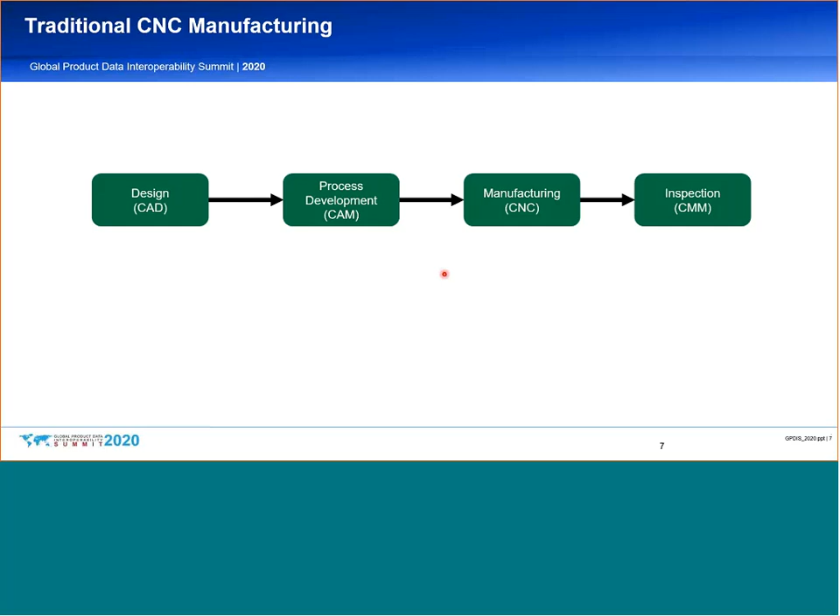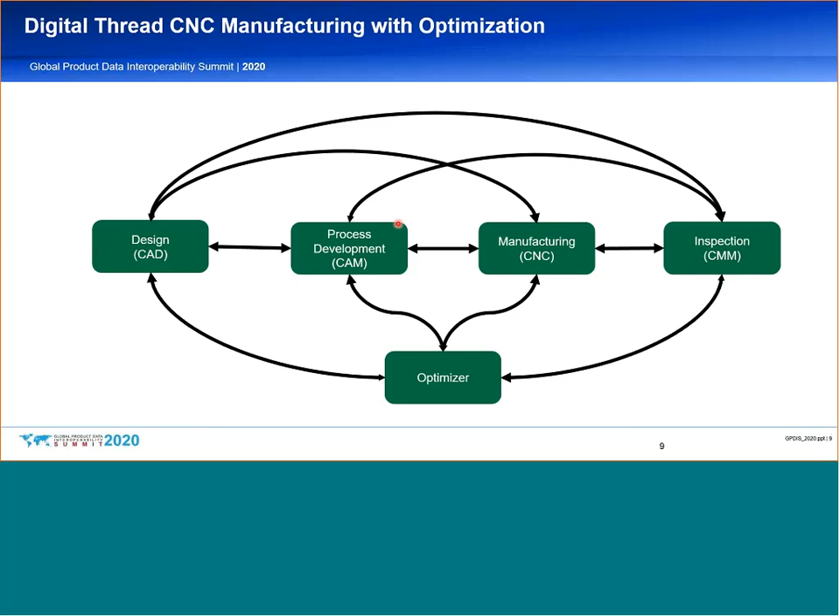Digital twin, digital thread is the buzzword. It's near the top of the hype cycle right now. Everyone's talking about it, and that's really great and exciting, but then what do you do with it? If you want to do something with it, you have to add extra capabilities. So let's add a process optimizer that can work between design, process development, manufacturing and inspection, and start to tie all this stuff together. Well, if you want to do that, then you just bumped yourself up to 10 bidirectional threads, all with large amounts of information that need to get passed back and forth between these disparate systems. And it becomes a really big mess really quickly.

And then if you want to do something more, let's say you want to add resource management to it. That is, okay, I've got a CNC machine tool, or I want to manage my cutters. I want to track what's going on in my cutters. I want to look at my inspection processes and tie that in. Every time you add something to get this information, you really complicate your data transfer. And we're up to, I think, 13 now is the count.

And what's interesting is that this is a pretty big mess, and if you look really carefully at the demonstrations and proposals in this world about doing some resource management or optimizing, you'll find that they don't show a picture like this. They'll just show the connection between a CNC and resources, or between a CNC and an optimizer. They won't show the whole mess because it's such a difficult thing to deal with if you're dealing with point solutions, that is, point-to-point, unique proprietary connections between all these different components. And so if you look carefully in these demonstrations, you'll see little workarounds to that.

Like, they want to develop communications between a CNC and a resource, so they'll invent a JSON schema or an XML schema to do that, or even worse, a comma-separated variable file, Excel spreadsheet way of communicating this information, which works in an individual segment, but it really misses the fact that you've got all these other components and processes that need access to the same data, and whatever schema you invent is going to be found wanting in the future, and you just get this big, massive mess.

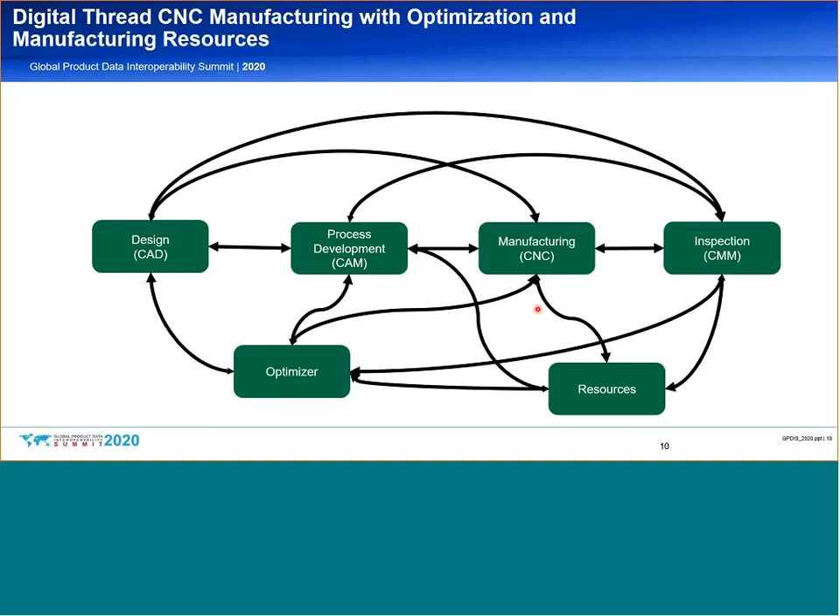And it's important, if we're going to be successful, and again, we're at the top of the hype cycle, that we make it implementable. So the idea of having a standard data bus can really help simplify this and make it easier for us to deploy and to expand and be really flexible in what we can do in this new world where we have ubiquitous data flowing from component to component.

So in this particular case, instead of this rat's nest up here, we go to what is essentially a data bus, where we have standard data that's able to bidirectionally communicate with an optimizer and with resources and with inspection and manufacturing and so on, using standard data that's been carefully architected to understand the data requirements, both for the immediate problem or what the future problems and challenges and requirements might be, and that data being in a more modern architecture that is less restricted by the storage limitations of the 1960s.

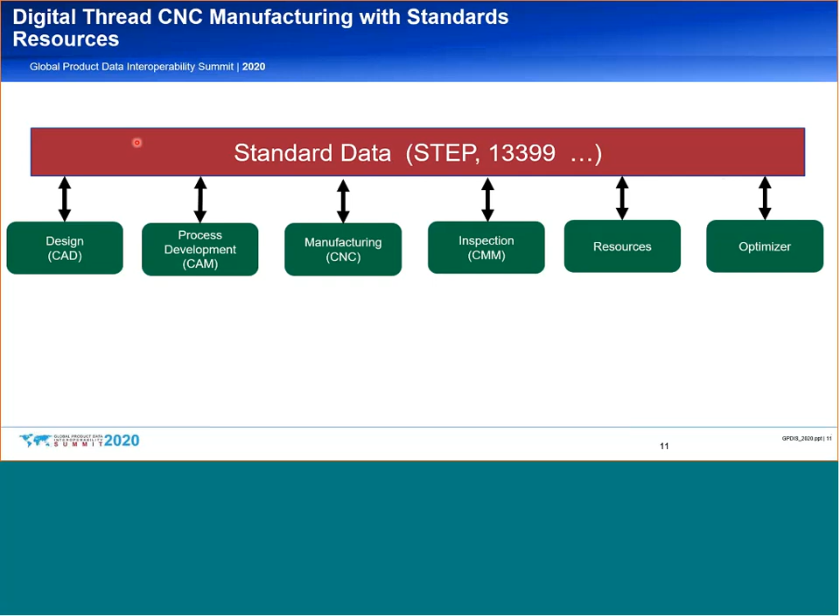And again, this gets easier as long as we're settled on what that data needs to look like, and as long as we've got a comprehensive suite of tools that we can put into a standard data bus that we can use to share this information. So fortunately, there's a lot of work that's been done in industry and in standards organizations and academia to put this standard data bus together.

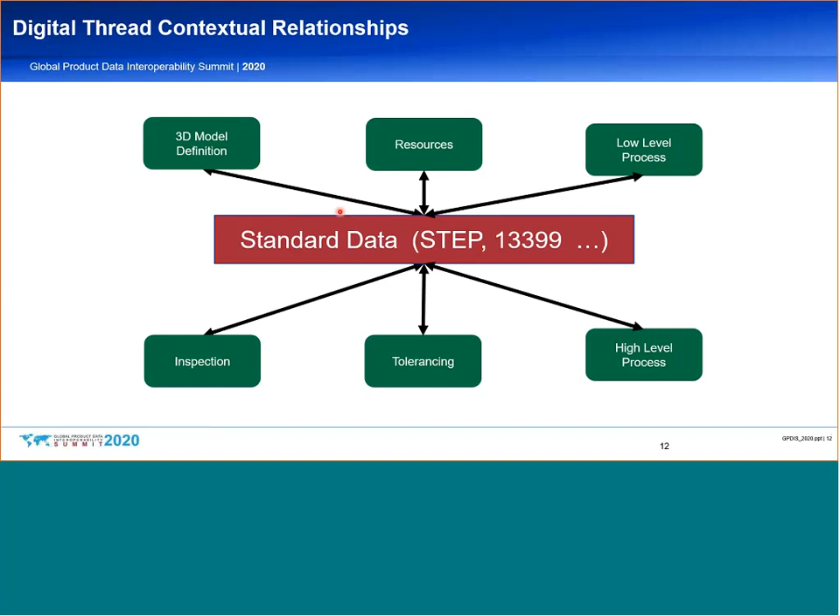So now that I've completely convinced you that we need to do it this way, what I want to do is spend much of the rest of this presentation talking about the various components of this standard data bus that's available to us now, where they are, how they work, and what state they're in. The first one I want to talk about is STEP. And probably most people have heard about STEP.

STEP is ubiquitous throughout design. When people talk about it, they say, give me a STEP file. What they're really saying is, give me an ISO 10303-242 file, which is defined as managed model-based 3D engineering. Us folks that work in the STEP world are notoriously vague and careless when it comes to throwing around terms and talking about something as STEP. You can call it STEP, you could call it 10303-242, or maybe we'll call it AP 242. It's all over the place. We're really sloppy about how we describe it.

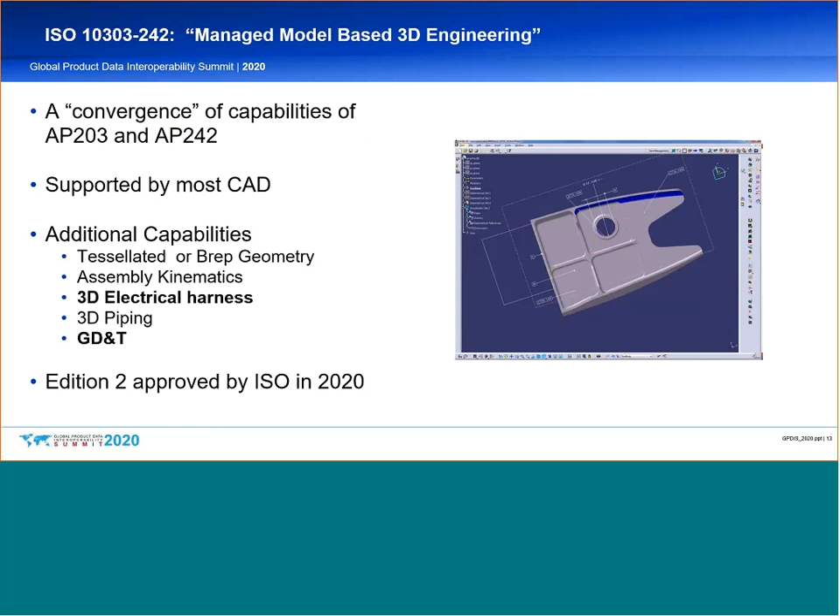And it has additional capabilities that you wouldn't expect. It can support geometry as tessellated or triangles, or it can represent data as B-rep geometry, that is explicit definitions of geometry. It can support kinematics. It has tools for working with three-dimensional electrical harnesses, three-dimensional piping, and dimensioning and tolerancing are all covered within STEP 242.

Edition 2 of STEP 242 was approved by ISO just this year in a pre-COVID world, and what changed in that was that the standard became more modular. That means it became easier to share different components of the standard with other parts of the STEP suite of tools. It makes it a lot more efficient how we can work with it. The tolerancing capabilities, or PMI capabilities, were enhanced as well.

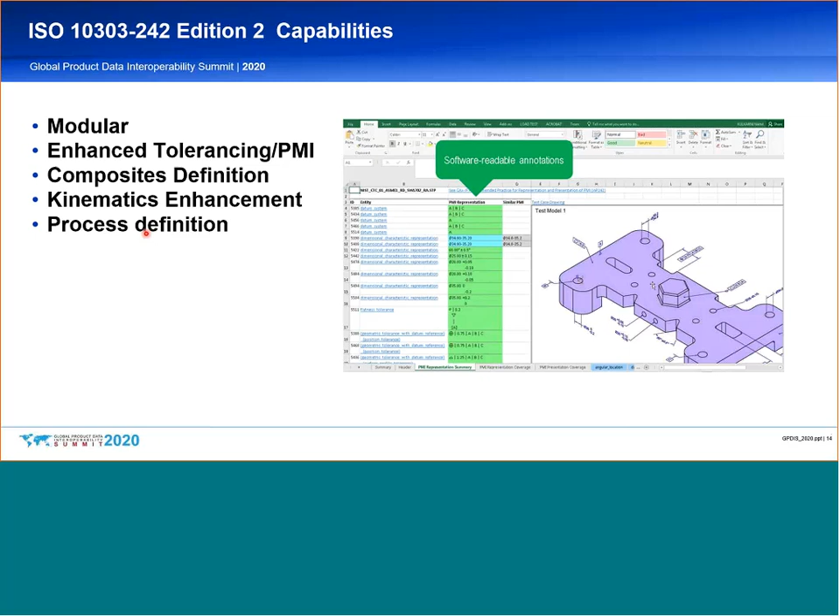Another thing that happened in edition 2 of STEP 242 is an improved composites definition, for the sorts of composites we folks at Boeing use for building airplanes and people use for doing all sorts of different things. Kinematics capability was enhanced, and actually STEP 242 Edition 2 has some capabilities to define processes. So at a high level, you can get somewhat of a process definition in STEP 242. Ubiquitous, all over the place, does a whole lot of stuff, really easy to use and easy to get at.

Slightly less known, or significantly less known than STEP 242, is STEP 238. And again, I'm being sloppy with my terminology. STEP 238 is ISO 10303-238, or Application Interpreted Model for Computerized Numerical Controllers. And you can see why we say STEP 238. It's got a slang term for it known as STEP-NC.

It's got a modern data structure, and it follows CNC manufacturing processes. High-level information like what is the part, what's the stock, what's the fixturing, what's the cutters. But also in it, you can see low-level process information is there. The cutter motion is there. Machine motion is there. Auxiliary functions are there.

Again, if you squint your eyes and look, you can see this is actually a file that's being displayed in a viewer by a small company called STEP Tools. And this displays graphically the content that's an AP238 file. You can see the fixture, you can see the part, you can see the cutter definition, you can see tolerancing information. On the left-hand side, you can see the process group.

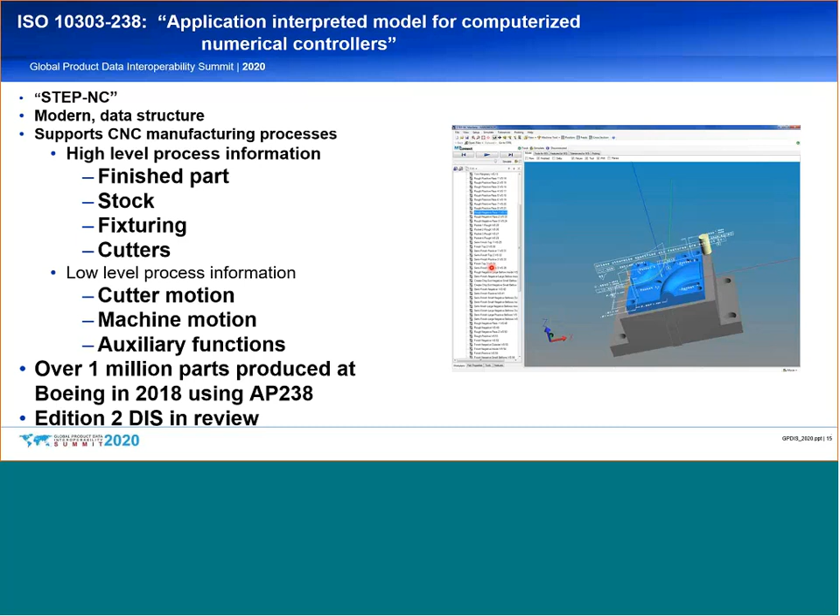Boeing, in 2018, produced over 1 million parts using STEP 238. And right now, its status is the second draft of Edition 2 is in review. Because these standards are synchronized or harmonized with one another, we had to wait for Edition 2 of 242 to get completed for us to do our Edition 2. And consequently, we were able to take all those advanced capabilities that we saw in Edition 2 of 242 and have access to it in 238, which is pretty cool.

So 238 did new things and better things. Some of the key capabilities for Edition 2 are, again, we inherited that modular infrastructure and architecture that we discussed in 242. We added automated composites manufacturing capability. If you look at this machine up on the right-hand side, I believe that lays down stringers for the 777X wing. I'm not completely sure. If you look really carefully, you can see you have different reels of fiber or tape and a multi-headed tape that will go down and will lay composites material down on this mandrel.

We had to make some changes to the schema of AP238 to manage the fact that we're handling 8 or 10 or 12 or however many rows of tape at the same time. We had to do some modifications to make that work in an efficient manner. And so that's additional capability that's in Edition 2 of 238.

We also added 3D printing process definition. You know, 3D printing, when you're talking about complex parts, is really more than just printing. A lot of people look at 3D printing, and certainly by its name, and they say, I have a 3D definition of a solid, and I'm going to press a button, and this 3D printer is going to spit it out. Well, that can work with really simple parts, but it's not so great when it comes to things that are complicated. There actually are process definitions that have to be defined.

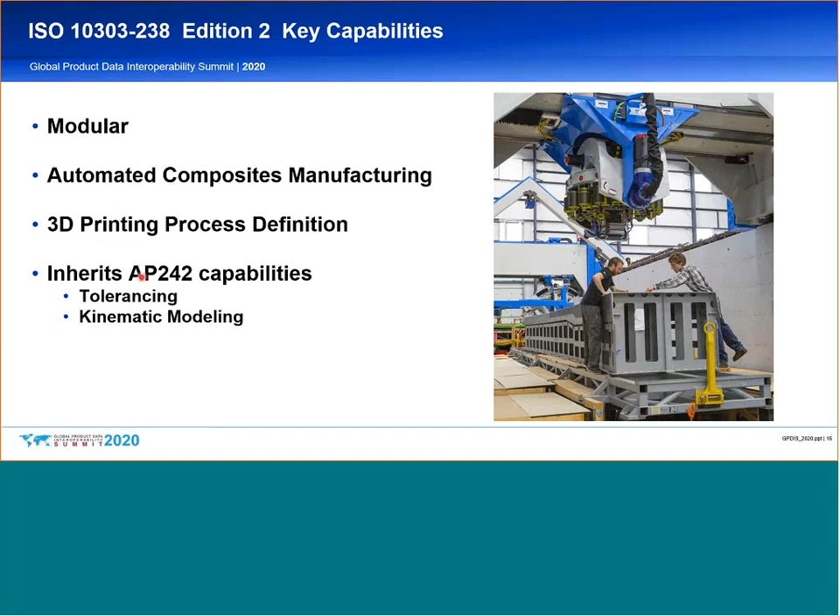Here's another one. This is ISO 13399. It's a cutting tool information standard. It's not part of the STEP suite of tools. All the STEP stuff is 10303. This is ISO 13399. It's managed by a different working group within ISO. It's STEP-like. It uses some of the capabilities of STEP representations, but it is its own standard. And it's for defining cutting tools.

It has the capability of defining tool components, such as, here's the cutter itself. Here's an insert. Here's an adapter. Here's another adapter. Here's a tool holder. And that can all be represented in ISO 13399, what the assembly itself is.

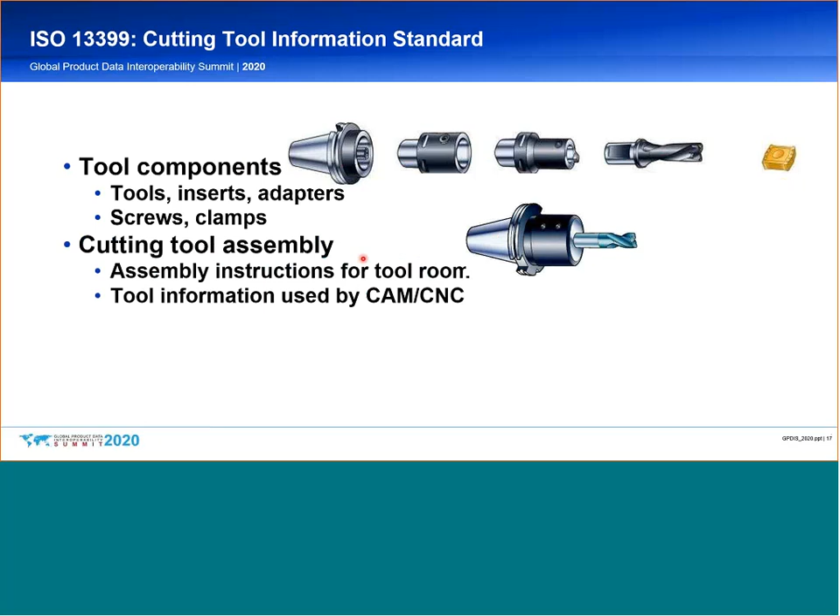But wait, there's more. It'll also define a cutting tool assembly. That is, how do these particular components fit together, and what are the rules for doing that? And it has the capability of providing assembly instructions for the tool room, and then also instructions and rules and data for the CNC machine tool to be able to utilize and understand and compensate for the length of that cutter or the diameter of that cutter, for example.

Additional capabilities of ISO 13399 is it will handle multi-function capabilities. That would be for a mill turn machine, wherein one particular tool body may have an insert that's being used for turning, and it may have another insert or more inserts that are being used for milling itself. And when you think about it, these relationships can really get pretty complicated, and that's when 13399 can step in in a neutral, non-proprietary way and help you define the components of the assembly and the assembly itself.

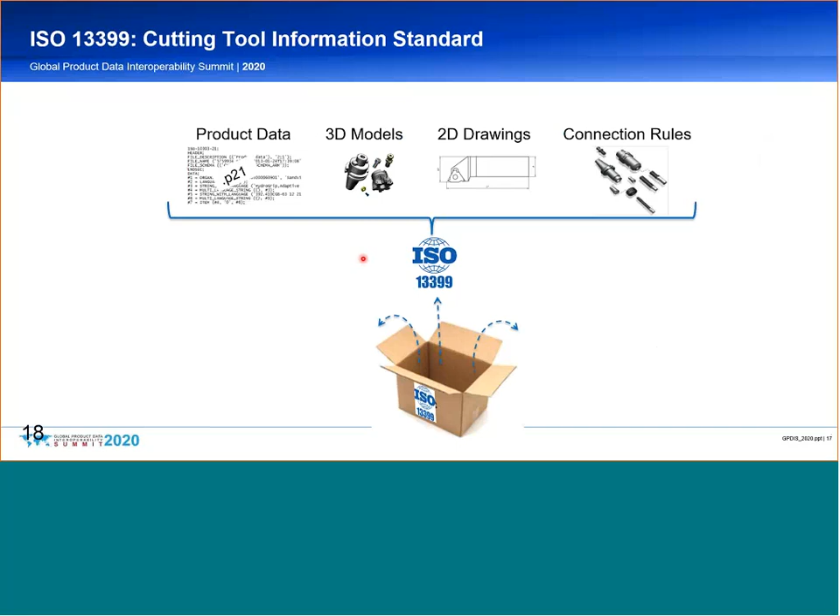Folks at 13399 also realized, though, that they needed to be able to do more than just define the tool components. They wanted to have 3D models of everything. They wanted to have 2D drawings because some places still use paper, and they wanted to be able to define the connection rules. What cutter can fit into what insert that can fit into what adapter that can fit into one type of a tool holder. So instead of making 13399 really, really big, what they did is they came up with the generic tool catalog, or the GTC.

And that GTC basically is a packaging method or a packaging definition that lets you take all these sorts of information. The drawing can be in DXF, for example. The 3D models can be in STEP or in something else. This product data is actually the 13399 data. It all gets packaged up so that basically you can ship or deliver everything you needed to know about your cutter to your supplier and to your end user and to whoever else is involved in using that particular cutter.

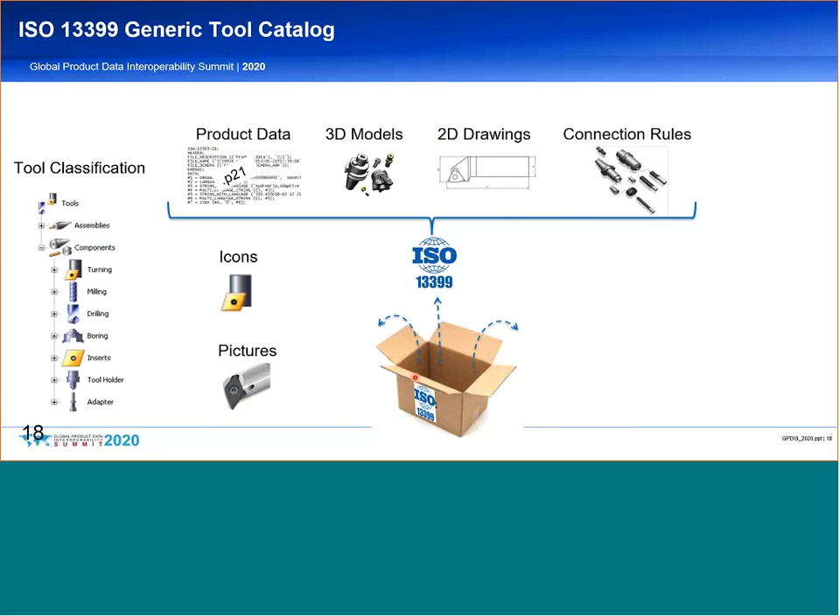In my little high-tech presentation here, which I stole, you can see a little tool classification chart on the end that, again, looks at the definitions of tools, and you can also see a packing slip, including the provenance of the data, who created the data, what's in there, and when was it created. It's a really pretty handy thing and a standard way for you to be able to find out everything that you need to know about that cutter or that tool.

And you think about it, your purchasing people need to know this information, your supplier needs to know it, the CNC machine tool needs to know it, your tool presetting lab needs to know it. And basically it's all this data in one place, in one defined format. A lot of people are using this.

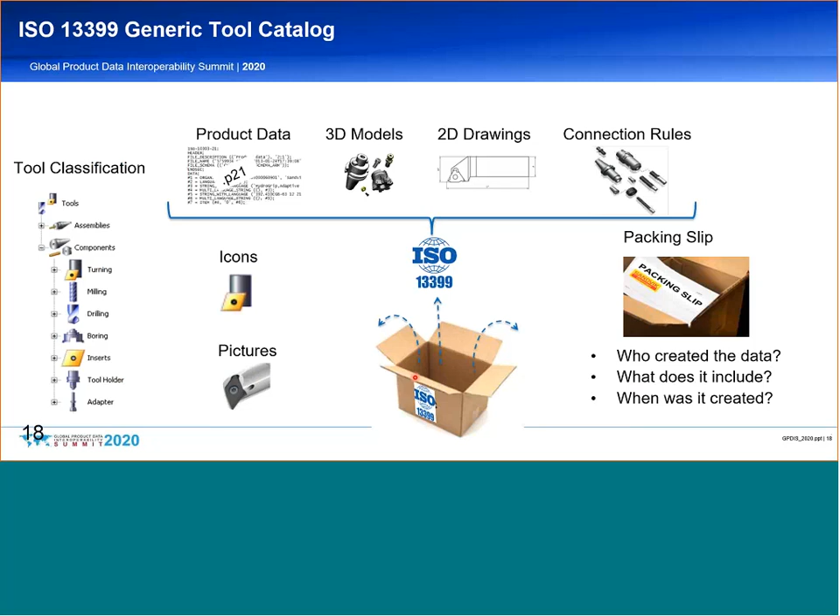So the last of the direct standards we're going to talk about is something called QIF, or the Quality Information Framework. It was developed by DMSC. These are the folks that were the developers of DMIS. You may remember a few slides ago when you were paying complete attention to what I was talking about and not doing anything else, where DMIS was an earlier way of communicating CMM instructions and I think results too. The folks at DMSC realized that they had to do something more modern, and so they invented QIF.

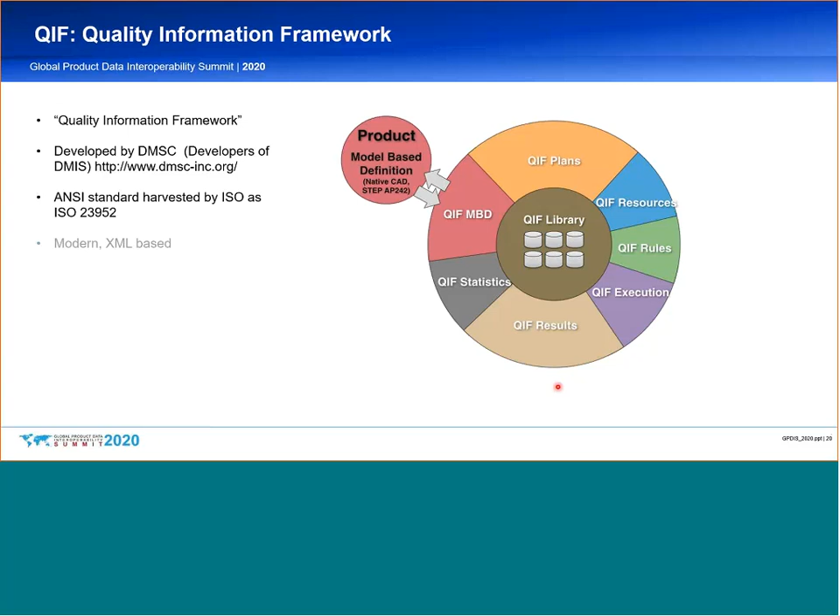It's modern. It's an XML-based schema. If you look at this chart here on the right-hand side, it has measurement plans, resources, rules, executions, results, and statistics can all be defined in there. It's pretty easy to work with.

I did a demonstration a few months back using QIF. I had limited help from our friends at QIF doing it because I wanted to see how good their deployment packages were. They were quite good. They had development kits that are available for free. They're in Python, C#, and C++. I took their .NET C# class and I converted it to Visual Basic.

And I did my coding in Visual Basic because I could, because again, it was part of the .NET infrastructure and it was really pretty easy to do. If anyone is looking for any tips or hints on the conversion to Visual Basic, you can feel free to contact me about it. And the DMSC website, which I have up here, I think they also got one called QIF. They provide these development kits for free, and they're quite good. They're quite easy to use.

So stay tuned because in 2 days on Thursday, Jennifer Herron and Curtis Brown from DMSC are going to be spending a whole lot of time talking about QIF. And QIF's really interesting to me. I'm not really a QA person, but I've been working with QIF standards for a couple of years now and find it really powerful and really interesting. So I hope you stay tuned for that and you show up for that GPDIS session in 2 days.

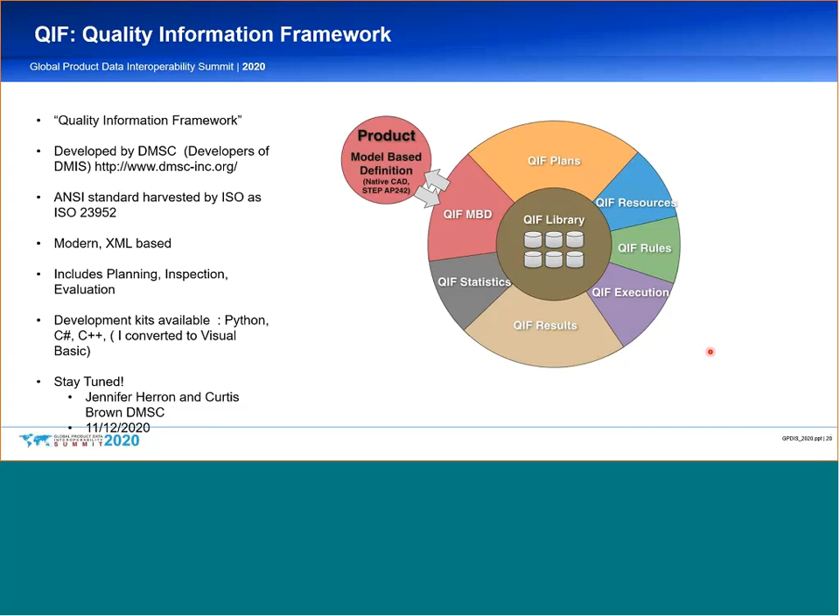There we go. Yeah, I touched briefly on a demonstration that I did. We did this as part of the ISO meeting in Toulouse, France, back in May of last year, and I've kind of shopped it around Boeing a bit. The point of the demonstration was to show that we could keep context of quality information and quality requirements throughout the entire PLM lifecycle.

So what we did was we took this test part, which actually came from our friends at Airbus. We assigned the tolerance requirements to the data. It was linked to the data itself. We then used STEP to manufacture the part. We then used that STEP file to automatically generate a program for a CMM to probe and inspect that part. And then we took that information that came from the inspection of the part, which happened to be in QIF. I imported it with this little tool that I created back into CATIA V5.

So essentially what you could do is right-click on a tolerance. You can see this is highlighted right here. You could right-click on a tolerance, and what would pop up was a crummy little SPC chart that I created that showed what the results of the past 20 runs on that part were.

And this is all made possible by the use of UUIDs, and I believe they're going to be talking about UUIDs, or QPIds, I think they call them in QIF, same thing, and show how we're able to use these unique tags in order to keep the context and the relationship between a manufacturing process, an inspection process, a design tolerance, and the actual design feature itself all linked together, which lets us use the digital thread to do something really useful, like have the design engineers look at the part that they designed throughout the manufacturing process and see how well it did.

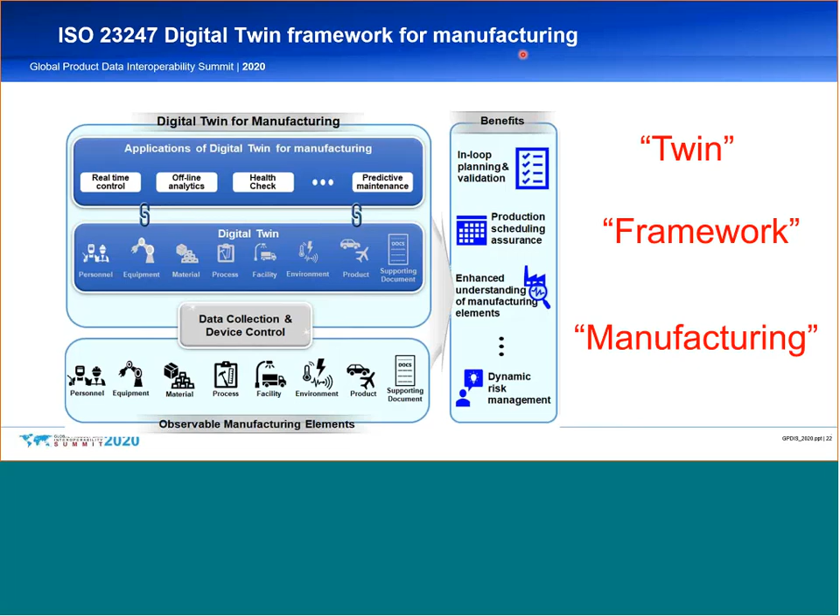So it's not a standard per se, but it's a framework. It doesn't tell you what standards you have to use. It doesn't tell you how you have to do things. It just describes a framework about how different standards can be used in order to be effective in doing digital twin manufacturing. And to talk about that a little bit more, here's another chart and a definition of it. It's divided into different levels.

The bottom level of this is the observable manufacturing element, and that's basically keeping an eye on what happens to the actual equipment when it's doing manufacturing or inspecting. The data collection and device control entity collects that data, and typically what we've seen in the applications that we've been demonstrating, it also transfers from the proprietary world of proprietary data standards down here up into standard data upstream. It makes it a lot easier to work with, where we can use the data standards that we talked about.

Well, that's interesting. That's the wrong button.

There we go. The digital twin entity is the area where digital twin models are being kept. Keep in mind that you've all heard about digital twins. You could have a digital twin of a part, you could have a digital twin of a structure, but you could also have a digital twin of a process. And for us at Boeing, it's important for us to not only know that the structure was manufactured, but in what manner it was manufactured, that the process requirements are being followed as well.

And then finally, at the top, learning and acting, that is the user entity level. It's able to harvest information from the digital twins so it can learn, develop understanding of what's going on in the manufacturing process and potentially optimize it. 23247 is layered on top of the IoT architecture, and it passed its second draft ballot just a couple weeks ago, and we've got a meeting tomorrow at 5 o'clock in the morning to talk about responding to the comments that we got to the DIS ballot.

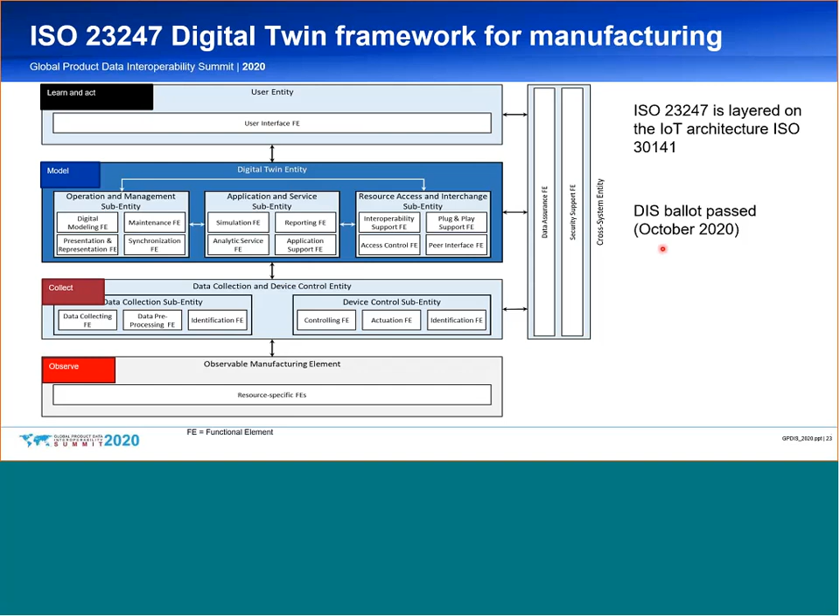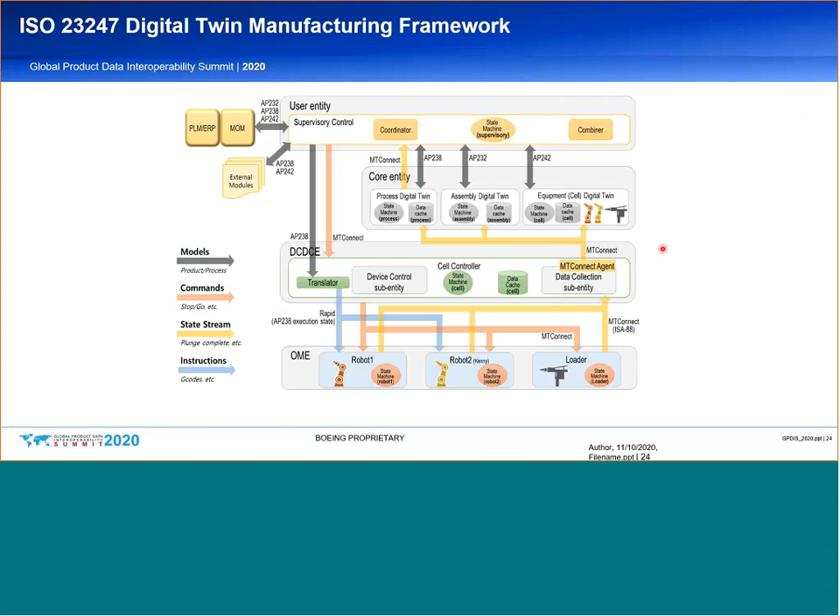A second use case that we did was process optimization. This created digital twins of the cutters and manufacturing processes. It was done by our friends at Sandvik Coromant and Mitutoyo. And we showed that we could create digital twins of cutters with a potential of doing a better job of predicting tool life. The last demonstration was on fastener length optimization on an F-35.

In that particular case, we were virtually assembling the structure using digital twins and able to predict what the optimum fastener length was for this piece of structure, which they saw the potential of reducing weight on the aircraft by a couple hundred pounds, which is really pretty significant. We did this demo a few weeks ago.

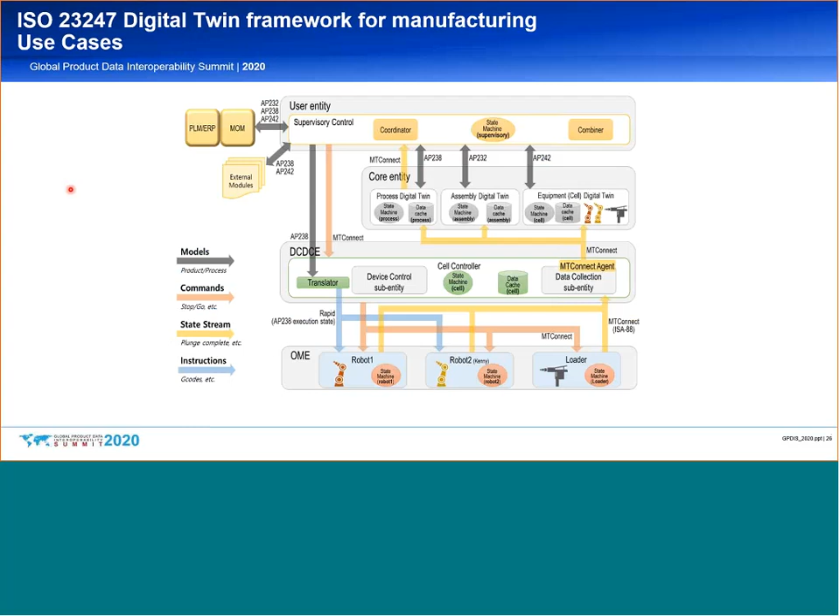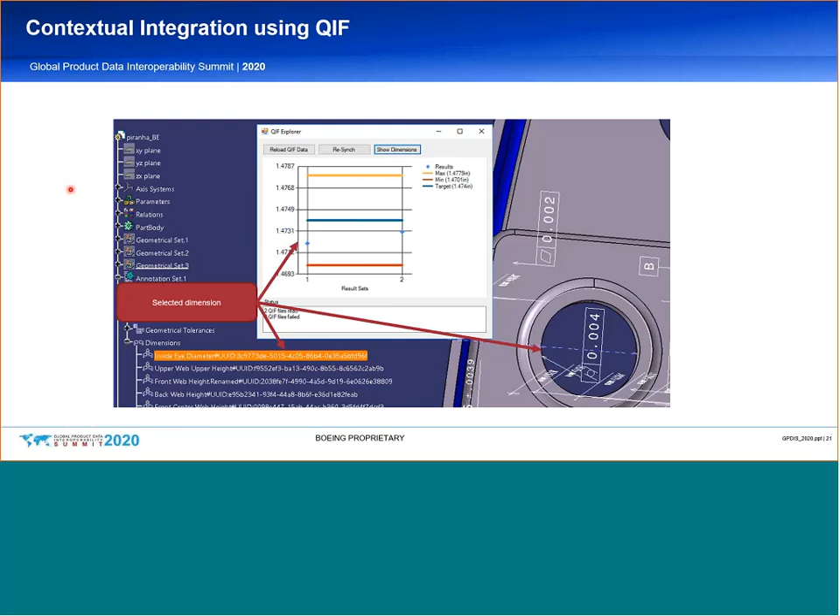And if you go back to that demonstration a few slides back, one of the reasons I did it was simply for that reason. I show this demonstration to design engineers, to the quality engineers, to the manufacturing people. And for the most part, the scales fall from their eyes and they realize that we're all in this together, and that when we populate the digital thread, it means that we can share this information and make things easier for everybody. That's a brilliant question, Lily. Thank you.

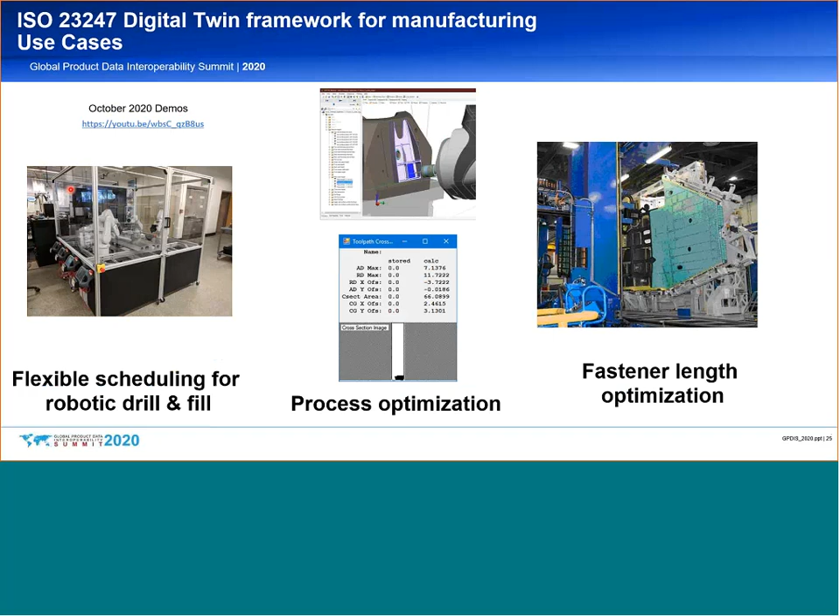The next question is, you've been at this for a while. Why is it taking so long? Oh, that one sounds familiar too. I think a lot of the answers to the first question really kind of support why it's taking so long. It's taking so long because we've just been so crazy successful with our existing paradigm, with our existing models.

I've used step change and paradigm already, so that's it for my buzzword allowance for the day and for this presentation.

Okay, and I think this is going to be the last question. Where are these standards being implemented in production? So as far as STEP 238 is concerned, the only company that I'm aware of that's using it regularly in production is Boeing. And again, we made 1 million parts using STEP 238 in Boeing in 2018. I would venture a guess that we used it to develop more manufacturing processes than all the rest of our processes put together in that time.